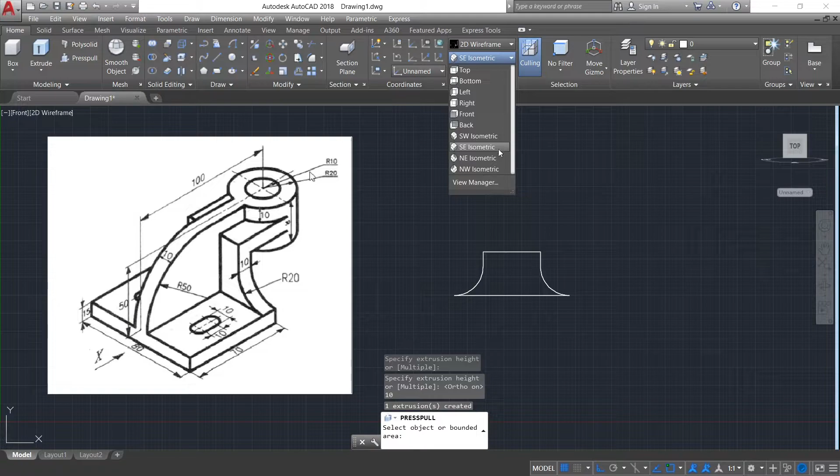Now I am going to press pull this object in this front view only. You might be surprised, but this also happens. So selecting this area, while you are press pulling in 2D view, make sure that your ortho mode is on. Here you can see while selecting this object, my ortho mode is on. So by pressing F8, I am again going to make my ortho mode on, giving the extrusion height of 10 mm, pressing enter. Now changing it to SE isometric. Here you can see that our object has extruded.

So now we are going to draw the top view of this object. Shifting from SE isometric to top view, here I am going to draw the slab and cylindrical section. So 40 mm vertical, 40 mm horizontal, making the square of 40 by 40 mm.

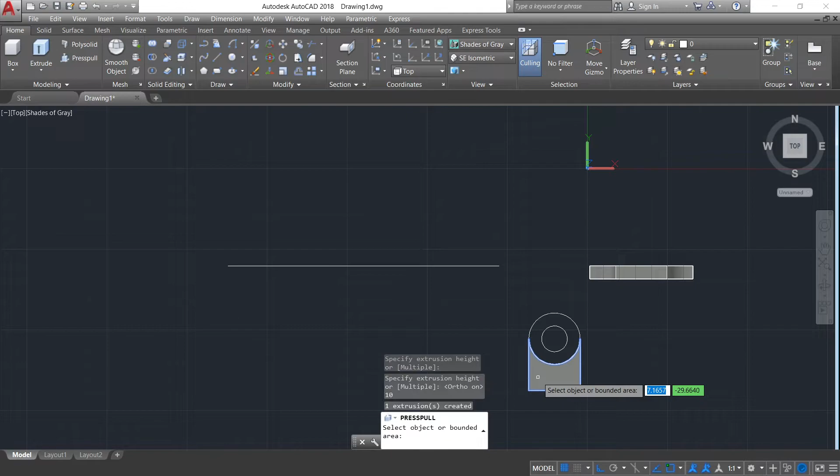Now taking the circles for the cylinder, circle of 20 mm, drawing another circle of radius 10 mm, selecting this additional line which you do not want, deleting this line, again press pulling this in top view only, selecting this area, making the ortho mode on, giving the extrusion height of 10 mm, again selecting this cylindrical area, ortho mode on and giving the extrusion height of 30 mm.

Now let's shift to SE isometric. Yes, you can see our object is extruded. Selecting this object, moving this object. Now shifting this cylinder 10 mm downwards, as you can see in the figure.

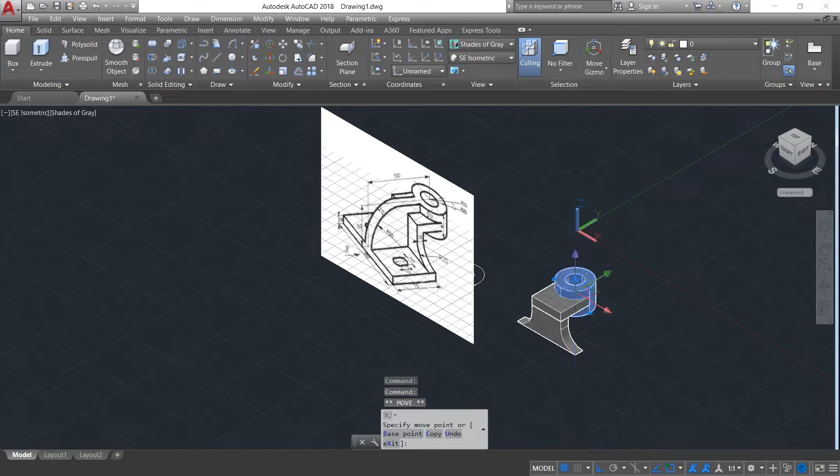First we need to delete the 2D design. Now shifting it from custom view to right hand side view. To draw the right hand side view, first we need to draw a downward slab which has the dimension of 70 mm by 15 mm.

Now let's give the offset of 20 mm to this shorter line, giving it the offset. Now again by using the line command, giving it the height of 50 mm for the curve section.

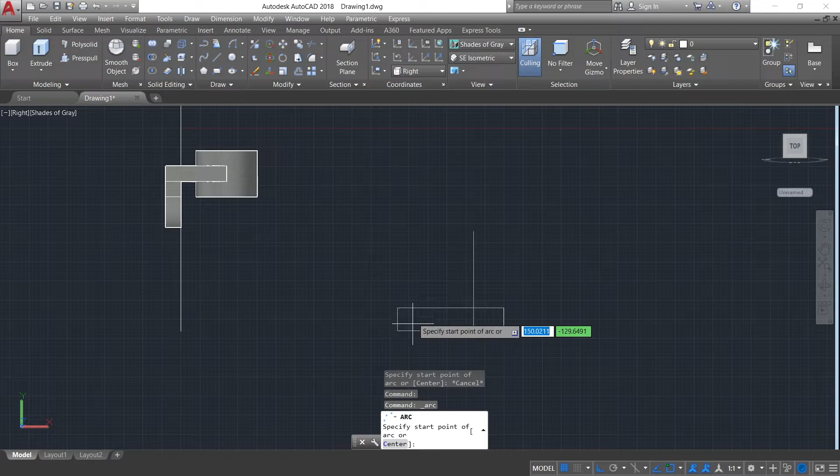Now selecting the arc, make sure that your arc is start, end, radius. So providing the starting point, ending point, and then radius. Here you can see our arc is ready. Deleting the extra lines. Now again by using the line command, from the end point of the curve, draw the line of 30 mm, draw the downward vertical line of 10 mm, horizontal line of 20 mm, and make it perpendicular to the slab.

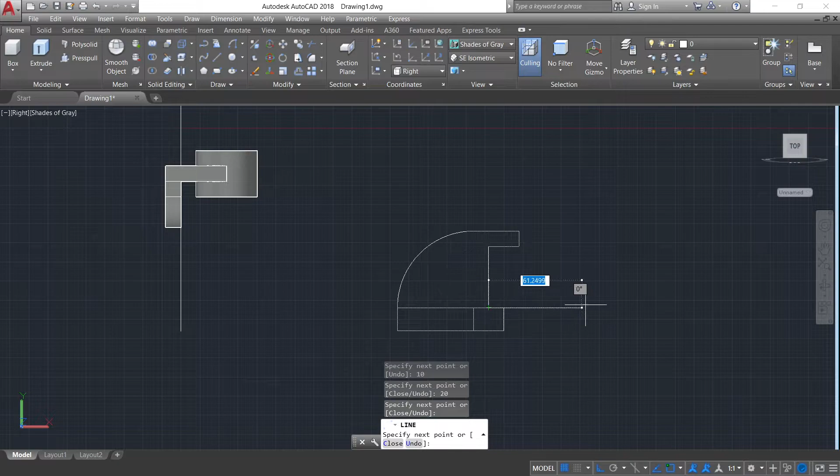Deleting the extra line, shifting it to SE isometric. Now here comes the press pull part. Press pulling this object to 10. Now press pulling this downward to 80 mm.

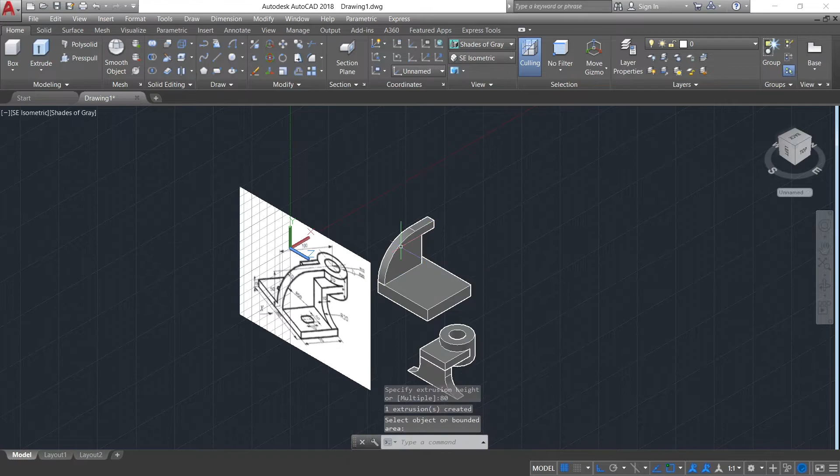Selecting this object and moving it to the center by using the move command. By joining the midpoints, selecting this object again by using the move command, specifying the slab upper part as the base point and joining it, deleting the 2D design.

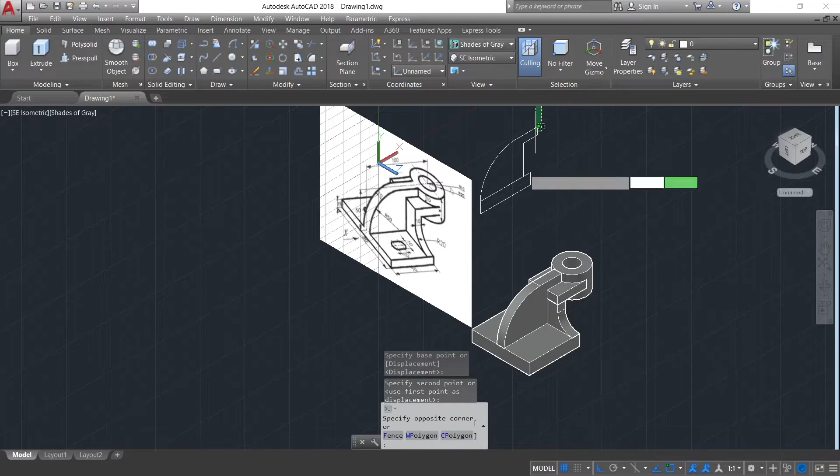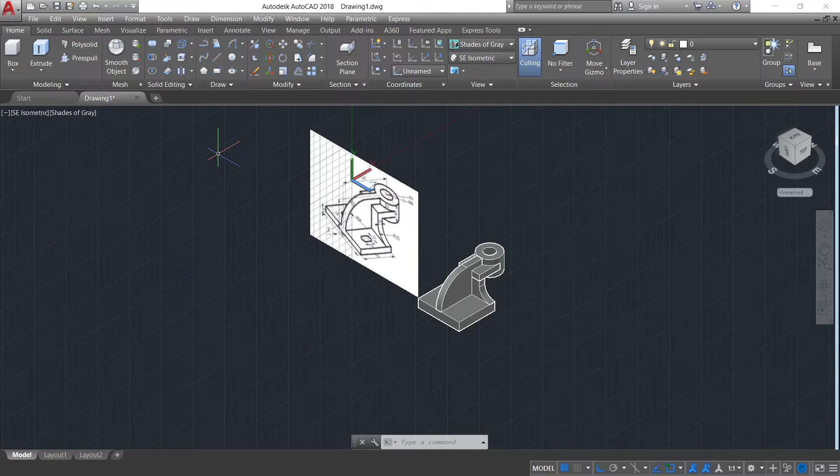Here you can see that our object is almost ready, but these circular or cylindrical holes are remaining. So to make this, let's go again to the top view, making a rectangle using the line command, or a square of 10 by 10 mm.

Now drawing the arc, make sure that your arc is start, center, end. So here start, center, and end. Here the arc is downwards.

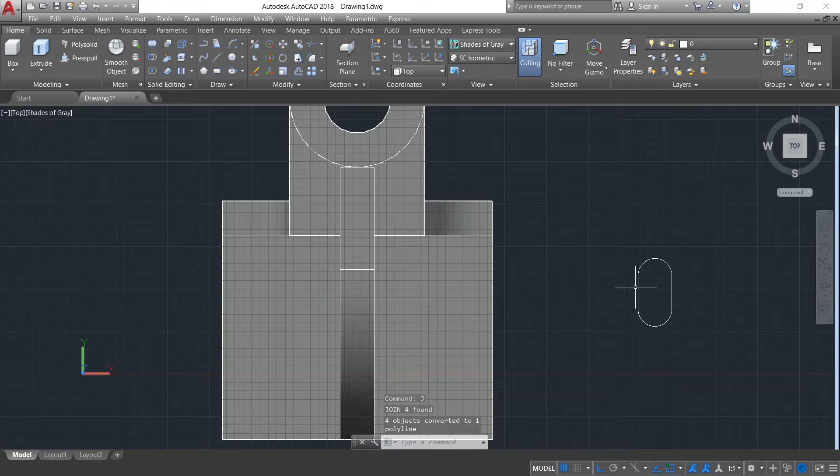So by using the move command, let's shift the arc. Now again by using the arc command, drawing the upper arc, start, center, end. Deleting this extra portion, selecting and combining or joining all the lines. To join all the lines, press J, select join, and this object is now made into one polyline.

So now select this object, move command, specify the base point at its geometric center, move towards here. Now selecting this and moving it to a distance of 17.5 mm. Now in the upward direction to 30 mm. Pressing CO, enter.

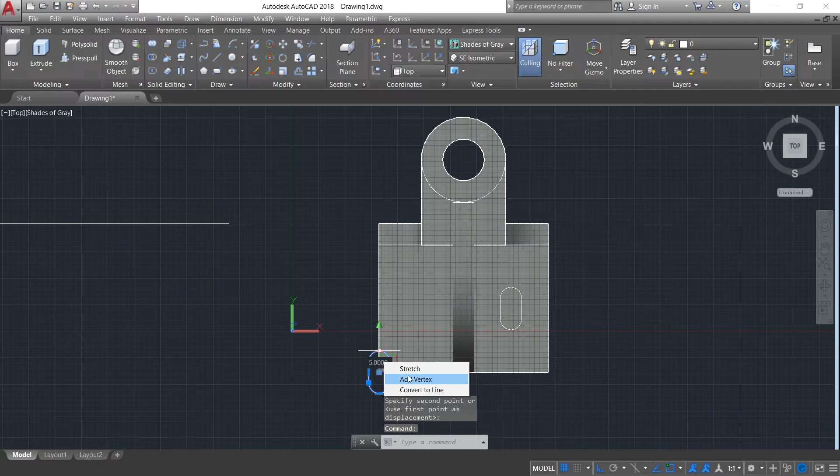Creating the replica outside of the object using the move command. Again moving this, press enter. Selecting this geometric center, shifting it to here. Now again selecting, giving 17.5 mm as horizontal displacement, shifting upwards to 30 mm.

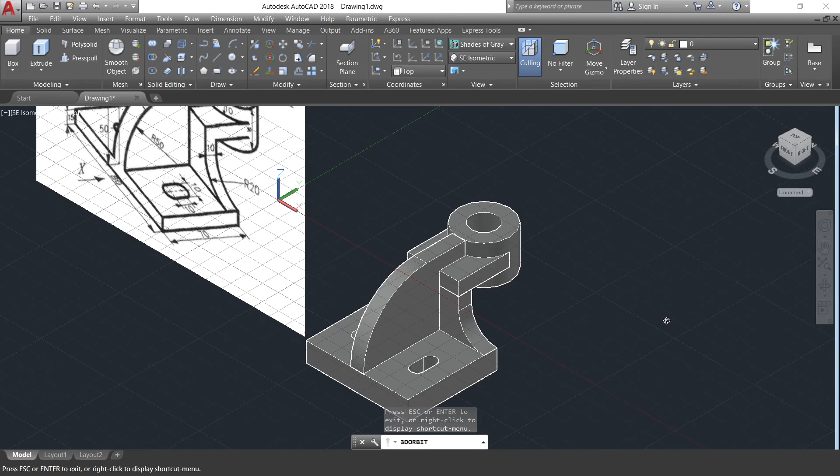Now changing it to SE isometric. Now using the press pull command, selecting this, press pulling to infinite height. Now again by using the 3D orbit command, I have to shift my view. So now again selecting the press pull command, press pulling this part to infinite height and downwards. Now you can see our object is almost ready.

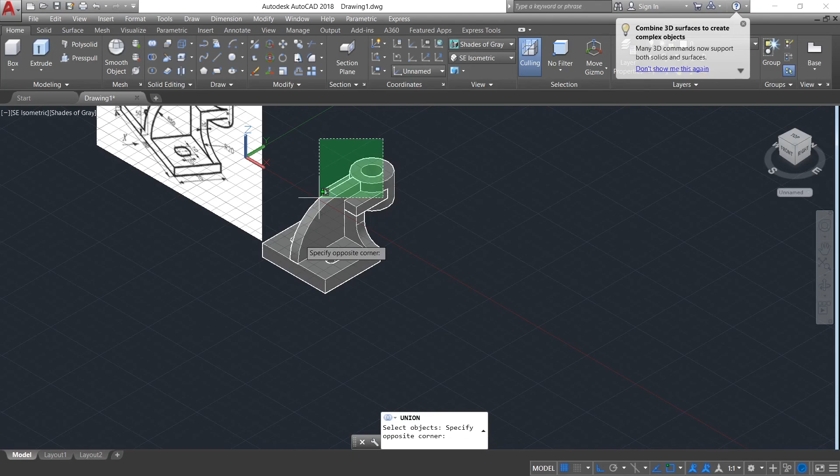Now it's time for the union command. Pressing the union command, selecting this whole object and press enter. Here you can see that our object is almost ready. Changing the viewpoint from shades of grey to realistic. Here you can see our object is almost ready.